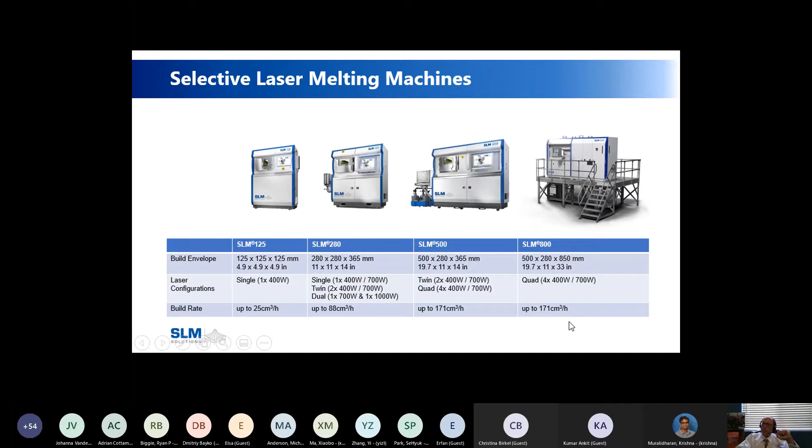When we talk about additive manufacturing, we talk about not only lasers and printing of metal, but the manufacturing and distribution of metal is a technology that could be discussed for a whole college class in and of its own. In fact, there are a lot of classes that focus on the metallurgy of powder manufacturing. So let's talk a little bit about this.

When you compare manufacturing technologies, you have castings, forgings, machining, and also additive manufacturing. Castings has been around for thousands of years - even the Romans used it a great deal, bringing in the Bronze Age and Iron Age, where they poured into sand. Believe it or not, sand casting is still very much a technology used in automotive and aviation today.

Then you take that casting and you heat it, and you can forge it either in a closed die or an open die to get you a shape that's near net. And then you would machine it.

From a purely physics standpoint, this is called subtractive manufacturing, because you are removing metal from a 3D shape - it could be a square, a cube, or a cylinder like this picture - but you are subtracting. We don't say, I'm going to go out into the shop floor and do some subtractive manufacturing. Nobody says that, unless you're in a physics lab. We say we're going to machine something, mill something, turn something. But from a physics standpoint, it's called subtractive manufacturing, because you're subtracting from a base.

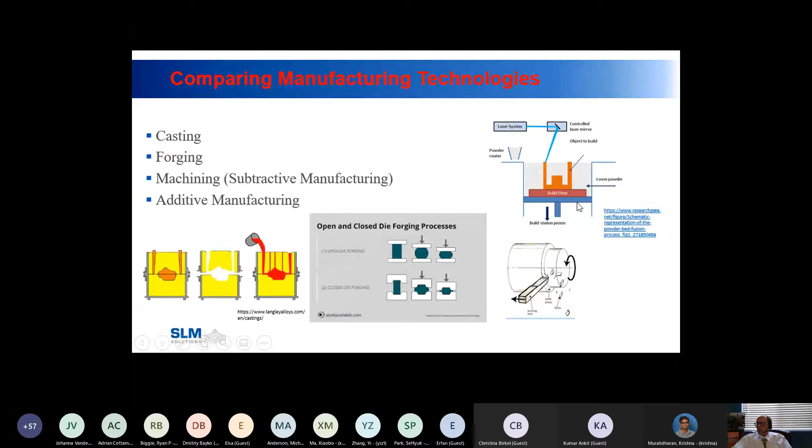And the reason I bring that up is because the inverse of that is how you got the name additive manufacturing, which is displayed in this little icon right here. So let's go to that and talk about laser powder bed fusion.

Additive manufacturing does not do away with conventional manufacturing methods like castings, forgings, or machining. Yes, I can print a part that you normally cast, or forge, or machine - I can print it. But additive in and of itself is not going to do away with those technologies. We should think of additive manufacturing as something that complements the manufacturing floor.

At a very high level, this is what a manufacturing system looks like. Now, when you do a seminar or series like this, you never really know who's in the audience. So what I want to do today is talk about this from the perspective of a very basic level, and then we're going to work up to the very complex.

All right, so hopefully I don't lose anybody. But you start out basically with a laser, and that laser hits a mirror and you fuse or weld powder. Now, when we talk about powder, a layer of powder is 30 to 60 micron layers thick.

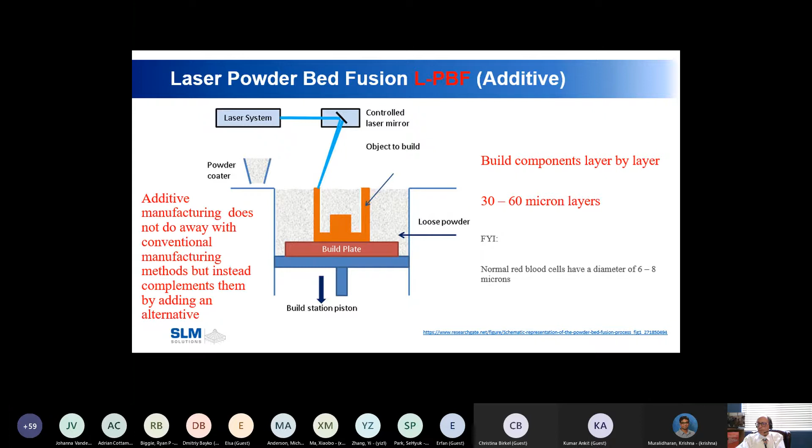So to reiterate one last time how the term additive manufacturing evolved: when you machine something, you are subtracting material. When you print something, you are adding material. And thus you got the name additive manufacturing. That's how that all came about.

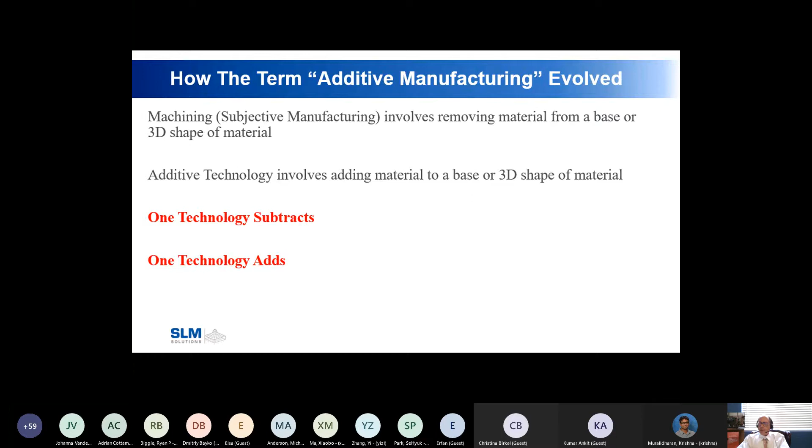Now, I told you this technology came to North America roughly around 2008, to Cincinnati, Ohio, by a company called Morris Technologies. Greg Morris brought this technology over using a company that was a competitor to ours called EOS. And the Germans referred to this as direct metal laser sintering.

I always thought the German-English translation messed up here. Sintering is something you do in a furnace as a form of heat treating. What we're doing is welding, fusing metal together. So it should have been called DMLF or DMLW. Sintering is not welding, sintering is a heat treat term, but whatever—it is what it is, and this technology has had that nomenclature for well over 15 years.

In Europe, they refer to this technology as selective laser melting, or SLM, because you literally are melting the material. Sometimes it's called laser additive layer melting, or additive layer manufacturing. There are some aerospace companies that refer to it as digital manufacturing.

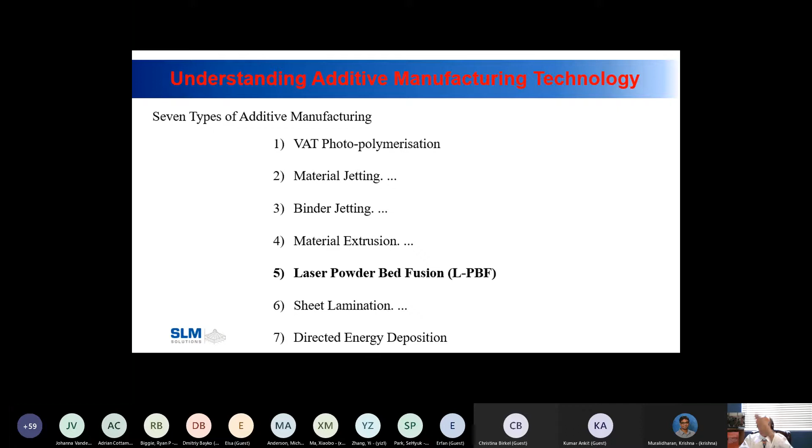Now in the world of additive manufacturing, the industry agrees there are typically 7 different types of additive manufacturing, and we're not going to talk about 6 of these—we're only going to talk about laser powder bed fusion. But you need to know, if you're a student, that there are actually 7, and you can take classes in each of these if you so choose.

So we talked a little bit about the machines, we talked a little bit about the technology. Let's talk about the third element of this, and that's powder. To print anything, you have to have quality powder. And if you look at a material data sheet, you will see something like this.

I pulled this off the internet—this is the chemistry for nickel 718. Please notice the element they call component is always measured in weight. That's very important, and I'm going to explain that in the next slide. These are the elements that make up 718.

One of the premier powder companies is Praxair Surface Technologies, and they have a plant in Indianapolis, Indiana. It's really fascinating to walk through these powder companies. There are a few in the United States, they're all over Europe. On a side note, for aluminum there's only one in the United States, so all the aluminums that Boeing, Lockheed, these aerospace companies, SpaceX, Blue Origin—they all get their powder from the same place, and that's in California. In Canada there are 3 aluminum companies, and that's it for all of North America.

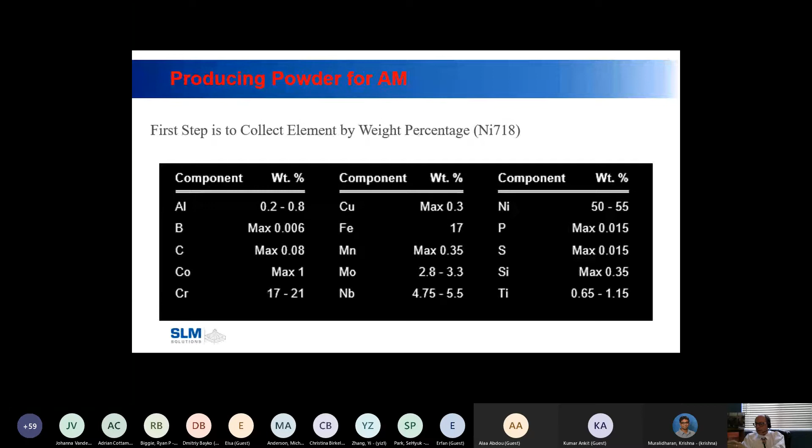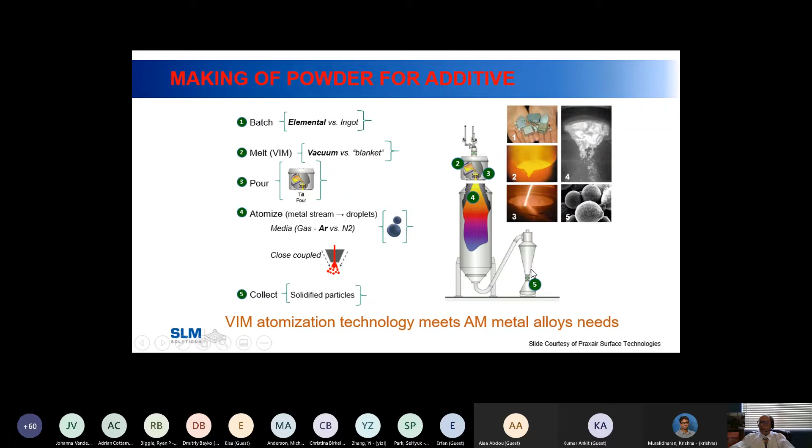It falls down through gravity and comes into this hopper here where they sieve it and they stratify it. I'll show you another picture that's more of an example, but they atomize it here, then they sieve it, and after they collect it, they'll put 6 or 7 screens on a vibrator with the atomized powder, and they shake it. The finer particles work their way through the finer screens. They inspect it, and then you get various piles of powder in different containers.

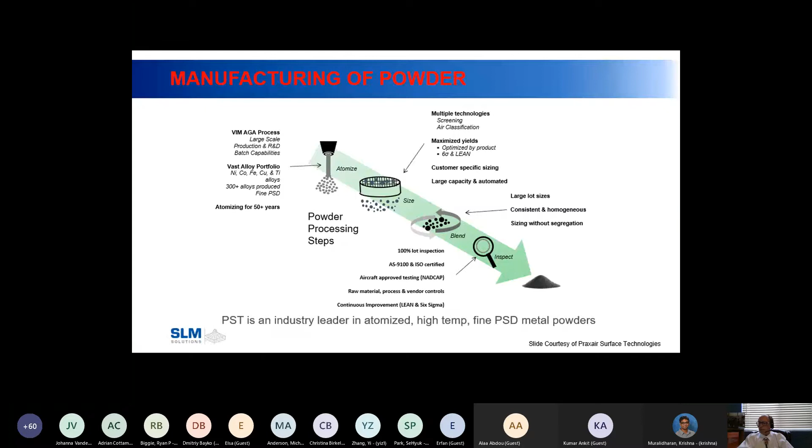So what do you do with all that powder? Well, some powder goes into binder jet additive manufacturing technology. Some powder on the higher end is used in electron beam, and some powder, the biggest particles, is used in what we call DED, directed energy deposition.

But the powder we use for laser powder bed is roughly 45 microns on the high side and 11 microns on the low side. Remember, a red blood cell is between 6 and 8 microns in size, so this is really, really fine powder. You can do a lot with it, but it also provides a danger to the customer, so personal protective equipment is very, very critical.

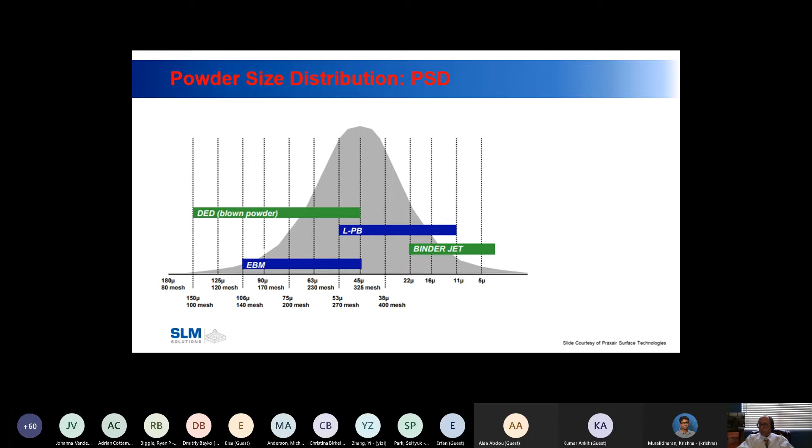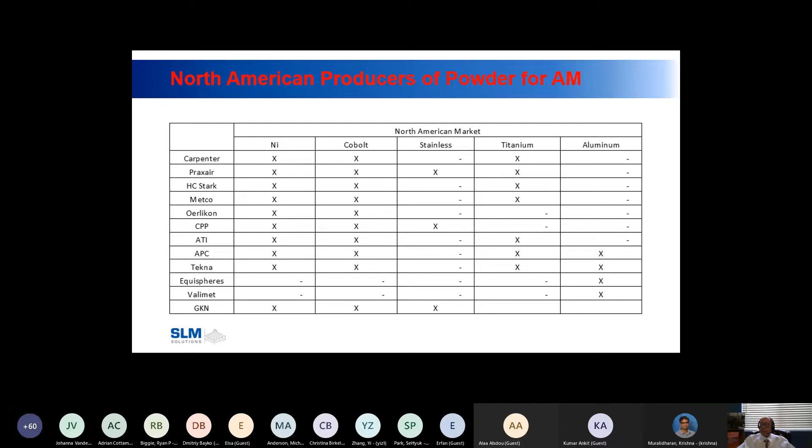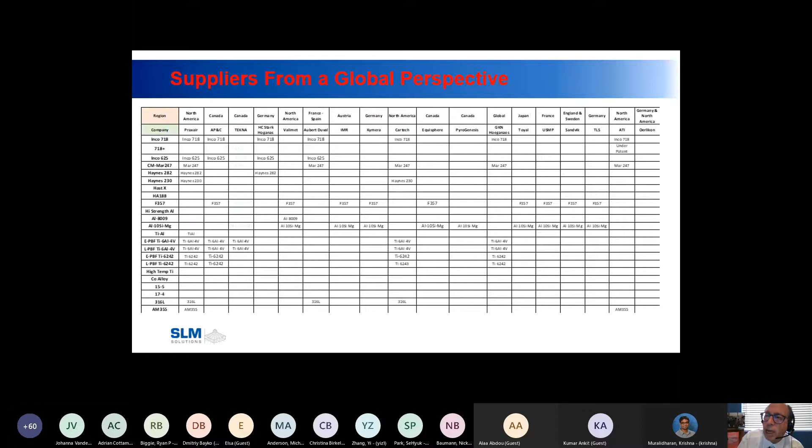If you look at the whole global market, at the top I have Germany, Canada, North America, United States, and England. There's a lot in England, a lot in Japan, and different alloys that they make. So there's a global market, and in all honesty, I don't have a solid understanding of the additive powder manufacturing in China - I know it's there, I just don't know it.

There's 1 or 2 companies in India, I think 1 or 2 companies in Australia, but by far Europe and the United States dominate that industry, and that's because of the aviation business.

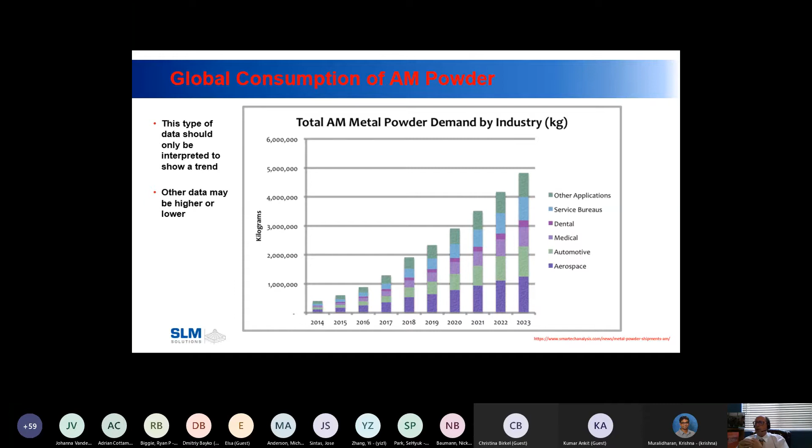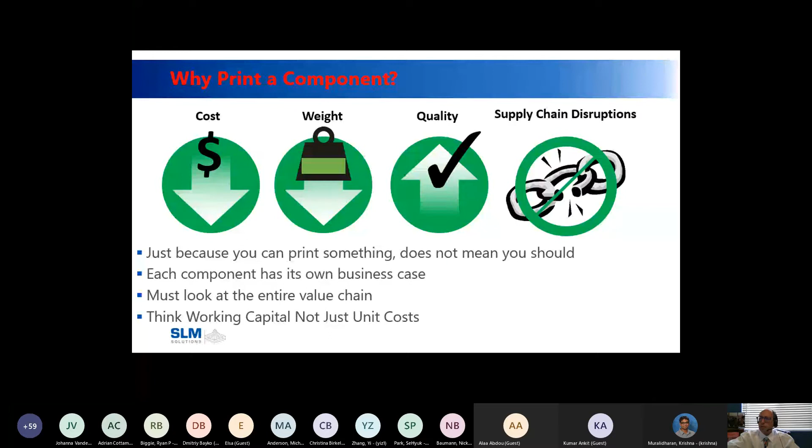So let's get into this. Aviation Week came out with an article on August 19th that Honeywell marked an additive engine milestone. What this is - a bearing hub, a bearing in the bottom, a bearing in the top, and this general area is an oil sump.

Now why would Honeywell print that? The annual volume of that part is 2 parts per year. That particular engine was designed in 1959 and 1960, and that creates a problem. If you look at industries around the world that have old components, old designs, this is a major, major problem, and they fall under the category called low volume, high value components.

A foundry plant manager does not want to see a part like this. They're paid - their goal is to get out so many tons of molten casted metal a week and a year. They're not paid to solve engineering or supply chain problems. They're paid to melt metal and make castings, that's what they do. So when you go to a foundry and tell them you want one part, they're probably going to just say, we're not quoting it.

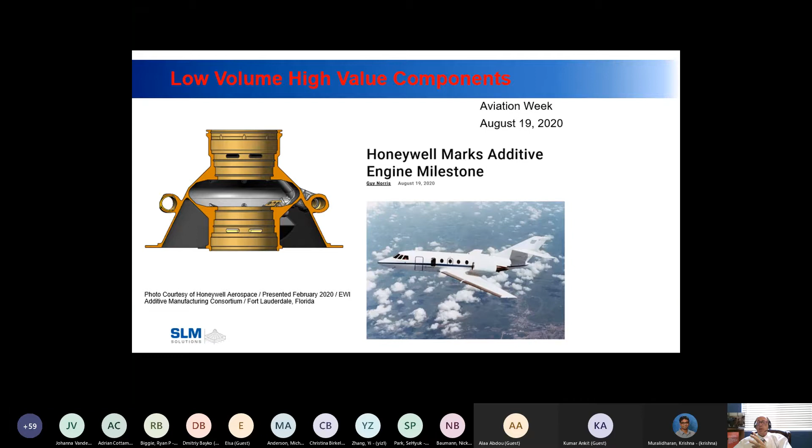So yes, it's a $500 part if you looked it up in SAP. On the other side of the coin, there's a cost of not shipping it. You cannot tell your customer, I don't want to make this part.

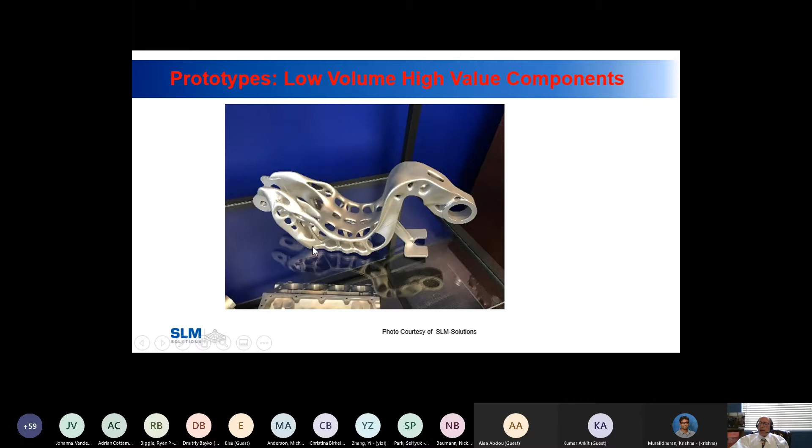So another reason you might want to print deals with topology optimization. Here's a bracket that is SLM made with titanium. And what we did here is we went and put holes throughout it, and yet it still has the structural integrity to meet the needs of the design.

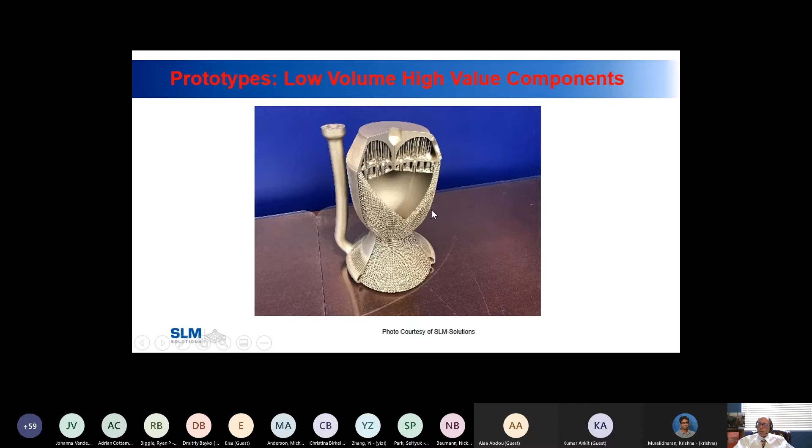Here is a rocket nozzle, and instead of casting a solid wall, what we have done down here is we've printed a mesh, and you do that to reduce the weight of that component. There is only one way in the world to make that part, and that is with additive manufacturing. So if this were a casting, this wall would be completely solid. But you see the solid wall on the outside? We cut that off so you could take a look at what we have here. That is a rocket nozzle, but it's a very lightweight rocket nozzle.

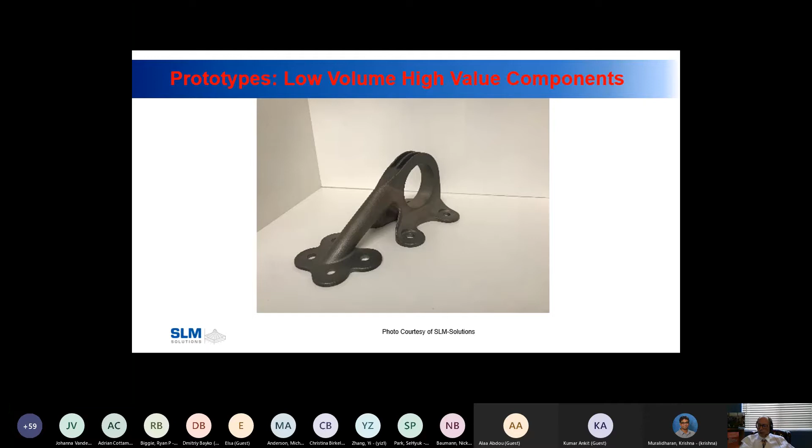Here is a hinge for a door that we were able to print and reduce the weight.

So let's talk about why a company would not use additive manufacturing. This is what I started a couple months ago, and I'm going to report out to some federal agencies next month. The program is called the Transfer of Knowledge and the Building of Confidence.

Culture and the perception of risk are the greatest hurdles to keeping additive from being integrated into aerospace designs.

Ford Motor Car Company in Detroit used to have hanging in their cafeteria a banner that says culture eats strategy for breakfast. What Ford was trying to convey in that message is that regardless of the technology, regardless of how great you have designed something, the culture you work in and perceived risk can prevent you from being successful.

Organizations that are not familiar with additive technologies can be hesitant of using it, because if you are in production with a sheet metal component and you change it, you have induced, from a theoretical standpoint, some element of risk. Now, it may be a minimal risk. But when you change something, you've induced risk.

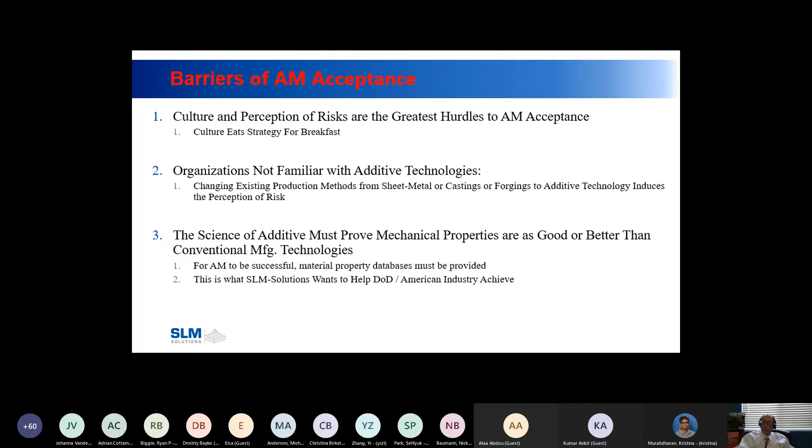And what we have to do in the additive world is use material science to prove that the mechanical properties are as good or better than conventional manufacturing methods. And that's what we are doing right now. That is what I am doing, working with universities in North America. So let me try to help you with that.

So let's say you own an aerospace company and you're concerned about the risk associated with additive manufacturing. Well, one of the things you want to know is, if I print something today on this machine, will it produce the same mechanical properties today as it did a month ago or a month from now? And so the repeatability of that particular machine has to be proven. You have to look at the whole value chain.

And the way you do that is we use a technique called process failure mode effects analysis. You have to fix everything. How you manufacture your powder, how you buy your powder, how you store your powder, how you load powder in the machine.

It has to be the same each and every time. The process machine values and parameters can never change - they have to be locked down. There has to be powder specifications, and that's one of the things industry is just now catching up with. Then you have to create this material property database, which we're going to talk about coming up.

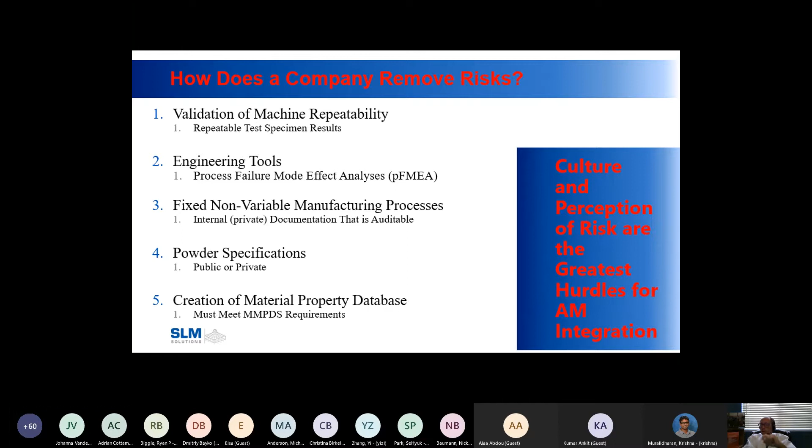Now, there are standards out there - AS 9100, ISO 9001, MMPDS, fixed processes. All of these things have to be recognized and applied to.

So how do we create a material database? It is the requirements of the component that dictate the tests that you do. So the tests that I am most familiar with are tensile machined specimens, in the vertical orientation and in the horizontal orientation.

So for an alloy like 718, you don't really see that - it's minute, sometimes not even present - a variation in tensile properties from vertical to horizontal. But alloys like 738 or 247, the variation can be quite large. So you have to know where that is.

LCF specimens, HCF specimens, creep - all of these things have to be understood. And you don't necessarily have to do them all for each part, but each database must have all of this data so that you can do families of parts.

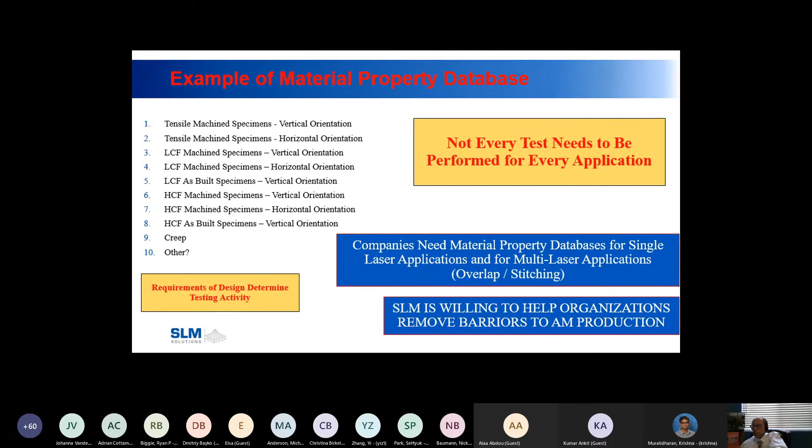Okay, so now we're going to talk about A basis, B basis. B basis is defined as 100 specimens that are statistically significantly grouped together. And I'll be honest, as I've been in multiple meetings, very rarely do you ever see people agreeing on what that means. Almost always we have to print and test 300 specimens across 10 powder lots, and I'll show you an example of that.

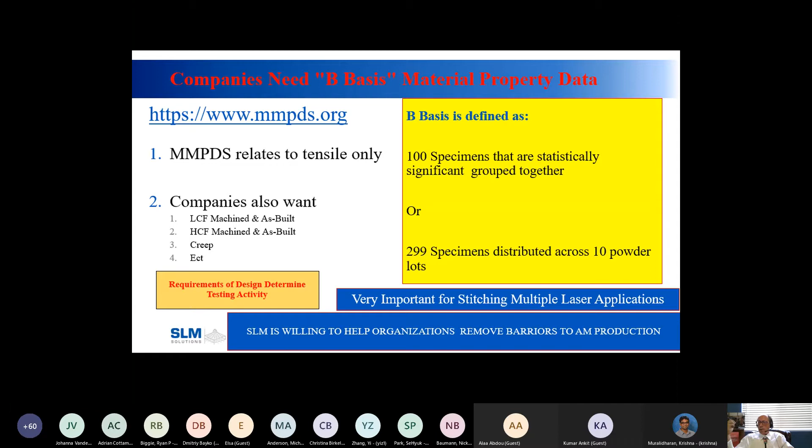LCF, HCF, machined and as-built, creep, etc. All of this data has to be generated, and that creates a real problem because it's extremely expensive.

You do it to a standard, and the standard for tensile that I use is ASTM specimen E8. So you print a specimen that is basically 0.60 square or diameter, and they're 3 inches long, and out of that you can machine an E8 standard. To get the exact dimensions of an E8 standard, you're going to have to get that off of ASTM - I'm not going to give that to you here.

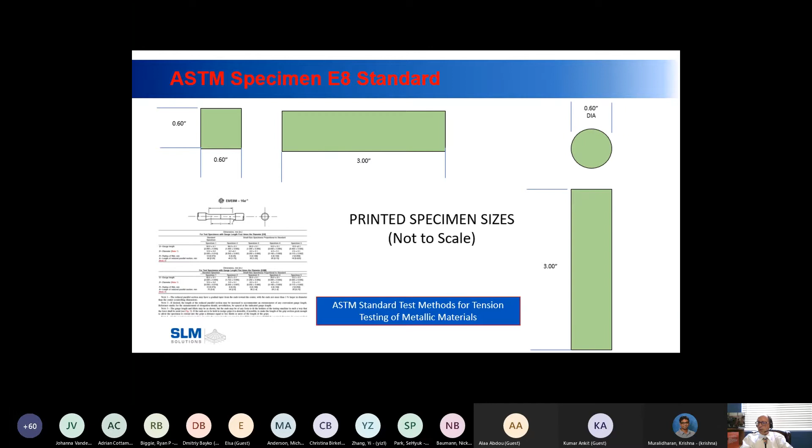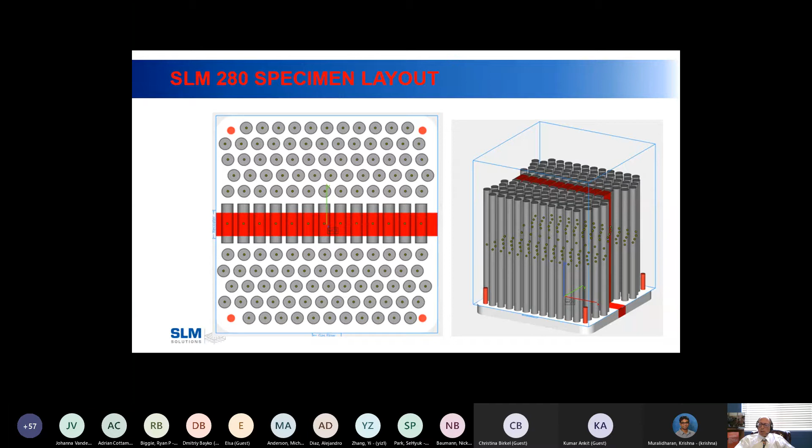And we are printing hundreds of these types of specimens for various customers in the United States that eventually will be given to NASA and ASTM so that they can write standards for industry to use. This is something SLM has committed themselves to doing at no cost to ASTM and NASA, and we are donating this information as long as those organizations can guarantee it will be given to American industry.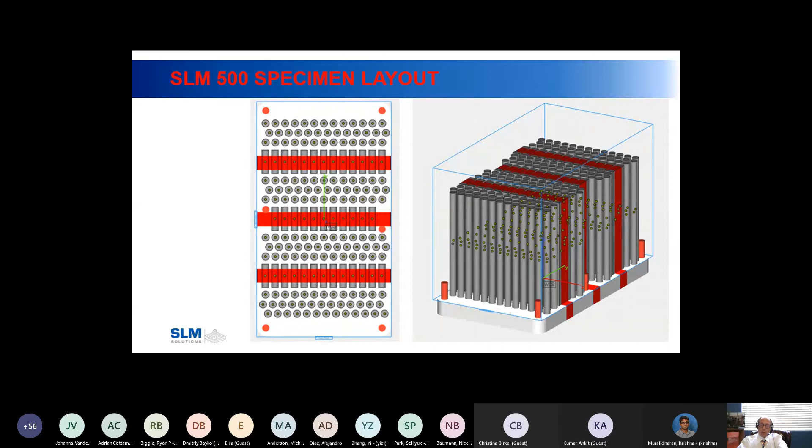And if you do this, you're going to have about 1,000 specimens. So to qualify this, to do these tests, you should plan on spending $500,000 to $800,000. And then you have to employ people to look at the data and interpret it, so that number is going to double, really.

You're not going to qualify an alloy without spending $1.5 million. Now, one of the things you have to do, particularly on a powder reuse study, is capture the powder.

So what we do is we print specimens like this, and really what these are is little vessels. So when you get powder, you take 100 grams, send it out to an outside lab, and validate that the chemistry of that powder is identical to the material data sheet. You don't want to start if it's not identical.

Then you start printing, and you capture powder at the bottom, the middle, and then the top. You send these powder specimens out to the exact same lab, or a different lab if you want, and measure the chemistry as it goes up in the build. You also take at least one specimen and measure the chemistry of the printed part. What you want to know is, does the printed specimen chemistry change during the printing process? That's one build, and that's very expensive to do, but it has to be done.

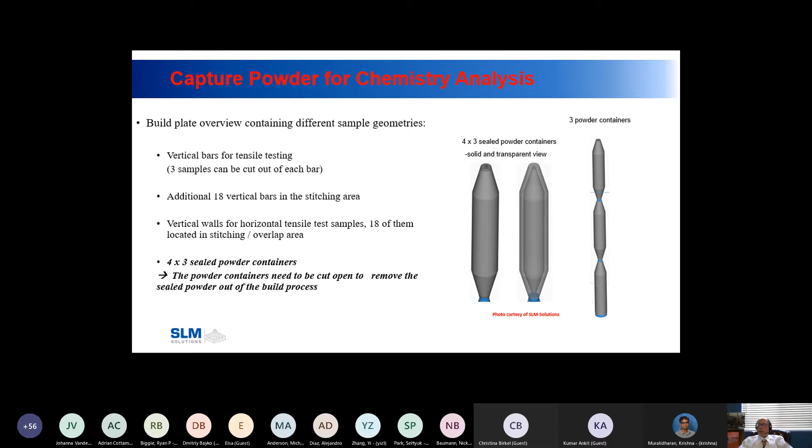Then you take that powder out, sieve it, put it back in, and do the exact same thing again. What the FAA wants to know is, does the chemistry of the powder change the more times you use it? If the chemistry does change, you have to prove whether it influences the mechanical properties of the part you just printed. That's part of the $1.5 million you're going to have to spend.

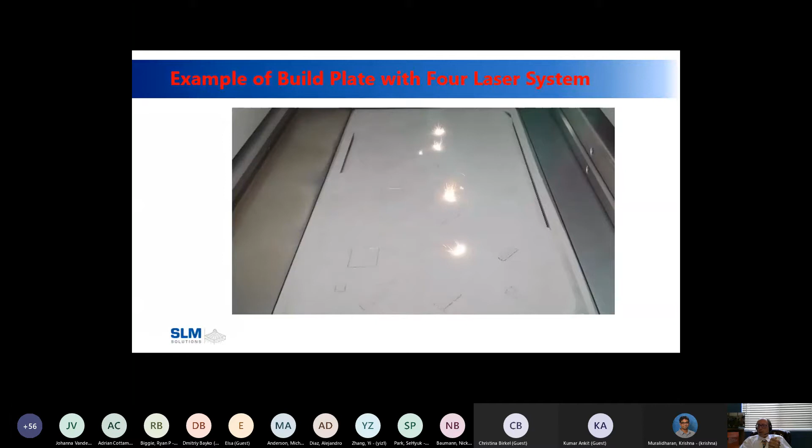Now, SLM has their SLM 500, that's what this is. This is 4 lasers working together. What we're doing here is building small cubes, 10 by 10 by 10 millimeters, and those cubes are in sections.

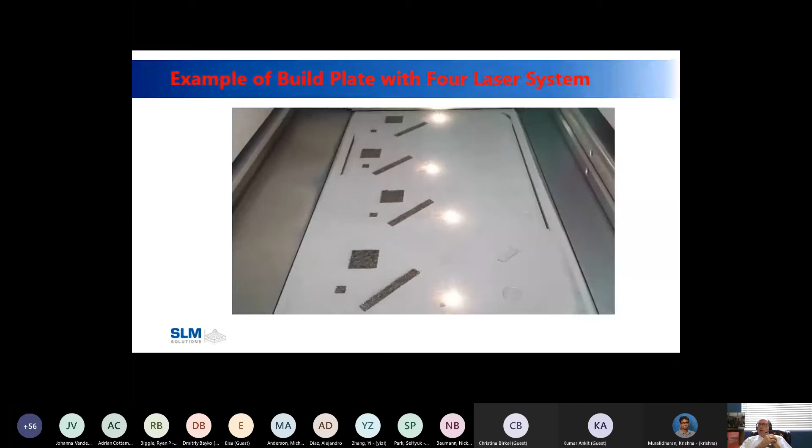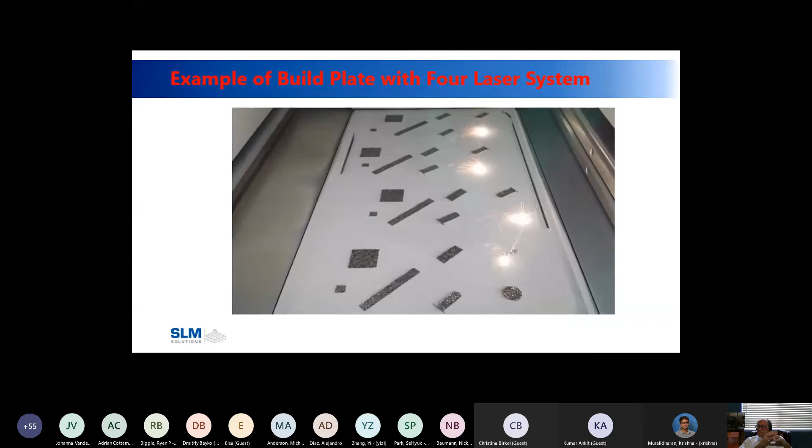Okay, so you saw the 4 lasers, right? This is the SLM machine, our platform for the SLM 500 and the SLM 800. What we're doing in these small cubes is building 10 by 10 millimeter cubes, and we will take these into the lab and look at density or lack of porosity.

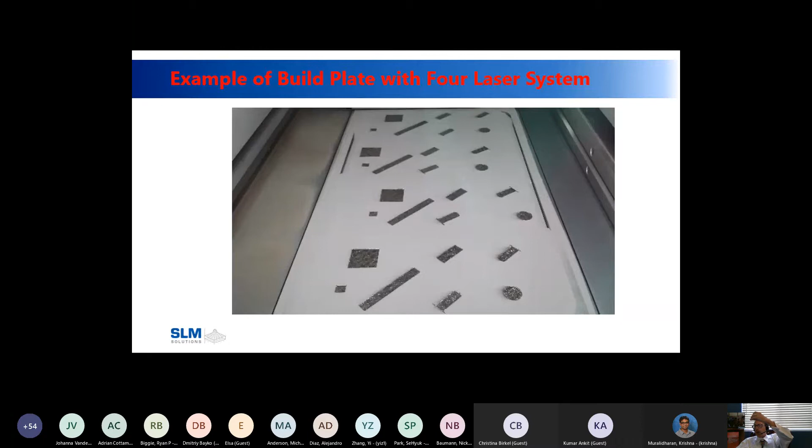Then we're building these horizontal tensile specimens, and depending on the height of this larger cube, you can cut 1, 2, or 3 specimens out of that. What this test is trying to show is the mechanical property results comparing laser 3 to laser 4. That's what we're doing here.

Typically, to do an MMPDS, you have to buy 10 different powder lots. I set this up for Ti64 material. You're going to test 170 vertical specimens across these 10 lots. As I said before, a room temperature test is roughly $110, so there's $5,000. As you go up in temperature, the price goes up because there's a dwell time to get the part to 1300 degrees Fahrenheit.

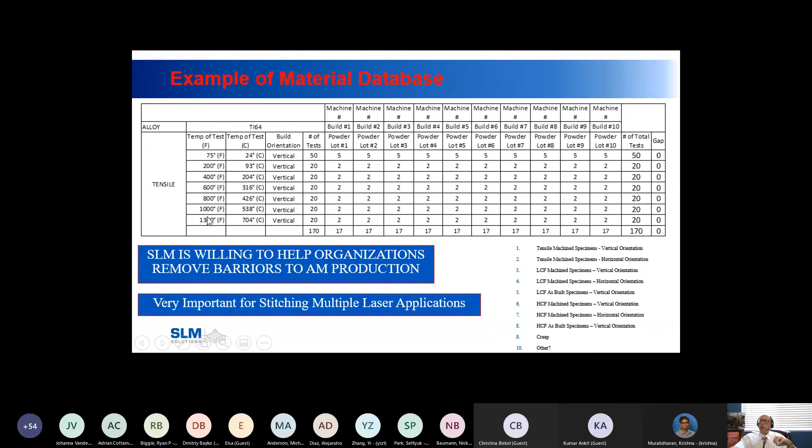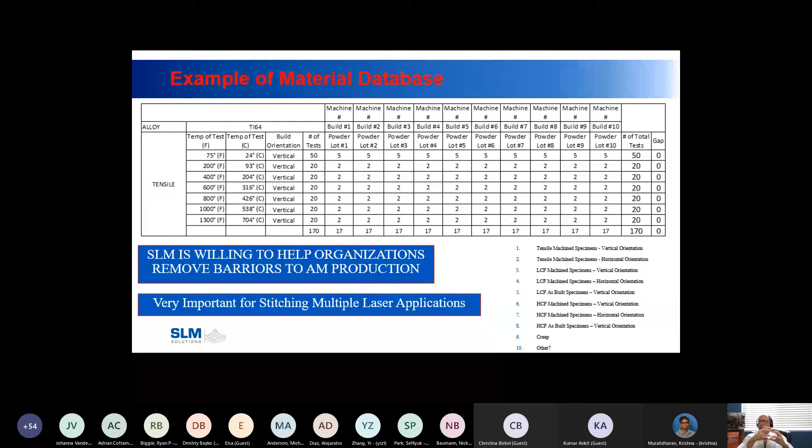Typically, you're not going to go much hotter than that for titanium. For nickel, this could go all the way up to 1900 degrees, depending on the alloy. So you're going to do 170, then 130 horizontals, giving you your 300 tensile specimens. Then you repeat that for LCF, HCF, and creep. So it's not cheap, right? It is not cheap to do.

Now, as we come up on our 45 minutes, I'm going to be real quick here. Where do students, what should they be majoring in? How can they get jobs in this technology?

Let's be realistic here. We are welding. We might be welding on a microscopic level, and that laser beam is 80 microns in diameter, but you are welding. So this is a great opportunity for welding engineering, but the problem is there's only 3 or 4 schools in America that have welding engineering degrees.

Metallurgy is critical. Additive manufacturing engineering, majoring in those two. Structural engineering, stress engineering.

One of the things that aerospace companies want to know is, do these parts pose a risk if I use them? And that's where the M&PE groups and the testing all come into play.

I'm working with two different universities right now, University of Arizona and ASU. ASU is actually going to publish a paper later this year on some of the work we've done in that area. At ASU, we only did tensile testing, I believe.